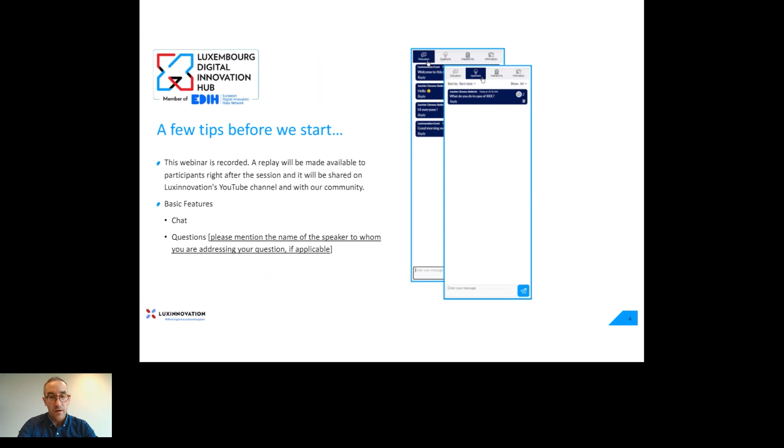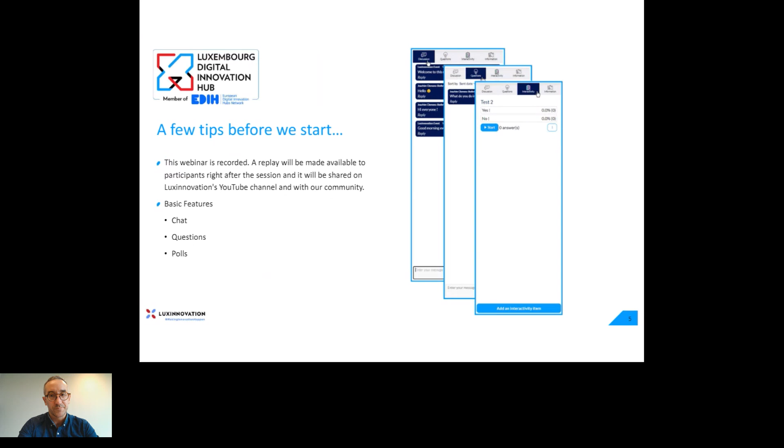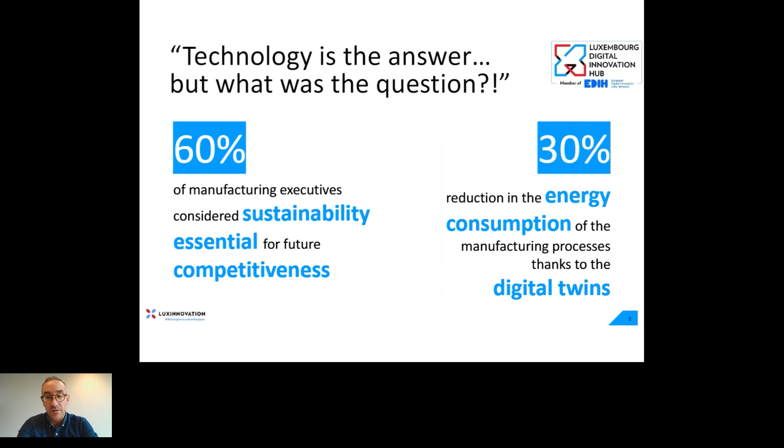So technology is the answer, but what was the question? A survey by the Manufacturing Leadership Council revealed that 60% of manufacturing executives in 2022 considered sustainability essential for future competitiveness, a significant increase from 40% in 2021. According to the same survey, manufacturers primarily focus on enhancing energy efficiency, reducing consumption, and transitioning to renewable energy sources. These initiatives are fundamentally connected to achieving net zero emission targets. This is where technology comes into play: the World Economic Forum has identified that implementing digital twins can save up to 30% of energy in the manufacturing process, as demonstrated for example by LG in one of its factories in Korea.

Without further ado, let's dive into the topic with our first speaker. Let's welcome Sébastien Thomas. Sébastien is an electromechanical engineer with a PhD in environmental sciences and management from the University of Liège, specialized in energy and environmental design for construction and renovation. As head of the energy management department at Énergie Agence, he leads a team in energy monitoring, data analysis, and efficiency improvement. Sébastien, the floor is yours.

Thank you, Nicolas, and thank you for the invitation to this seminar. I'll move to the first slide of my presentation. I'll give a few words about energy data as a sustainability lever today, starting with a short presentation of the company where I work, Énergie Agence. Maybe some of you know it well already, but just a summary: we are an engineering company dealing with services in energy and energy management.

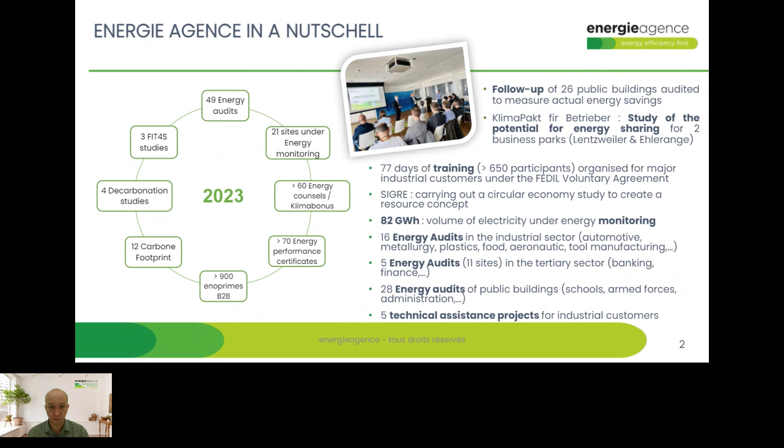Decarbonation is a hot topic today, we hear about it nearly every week in the news. There was a study in 2022 about industry and how to decarbonate. It shows there are many ways to decarbonate, but energy efficiency is quite important, with an estimated contribution of 24% to decarbonization. That's the first topic when we speak about energy data: it's energy efficiency.

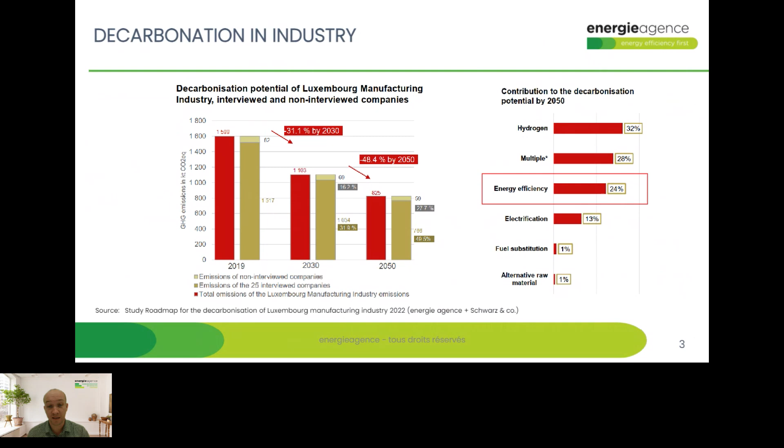I lead the department named Energy Management, but what is energy management? We have a definition: it's the process of monitoring, controlling, and optimizing energy consumption in a company or organization. It's a systematic strategy for maximizing energy efficiency and reducing energy-related expenses. It involves implementing policies, acting on equipment, and analyzing energy data.

When we speak about energy management, we have some main components. The first is data collection - we have to collect reliable real-time data to make good analysis. That's the second component. And afterward, we have to act - it's not only about analyzing data, but doing something to optimize it, and then evaluating the benefits.

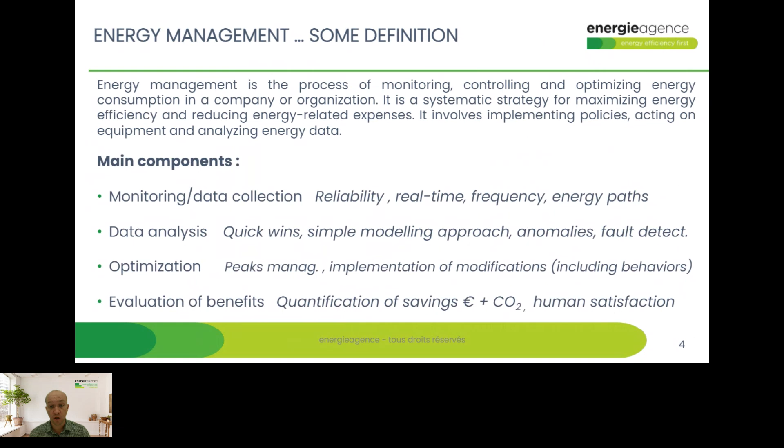Based on our experience, we have developed a methodology to show how energy management can help for decarbonation. First we assess the needs, to find the most energy-consuming parts - where is the most energy consumed? We don't measure everything, just what's important to measure. We can deploy and improve metering infrastructure. Afterward we do analysis, and what's important in data analysis is also alarm management, which is at least as important as data analysis - having alarms and reacting quickly when something isn't correct.

After data analysis, we have three levels for decarbonation. First, optimization of energy needs - to avoid peaks, to shave peaks, and to check the energy network inputs and outputs. Second, we can forecast energy consumption and generation, since many industries now have electricity production mainly with photovoltaics. And third, after analyzing data, we can propose a mix of solutions to decarbonate - not only shifting from gas to hydrogen in the future, but also dealing with storage, electricity storage, and thermal storage.

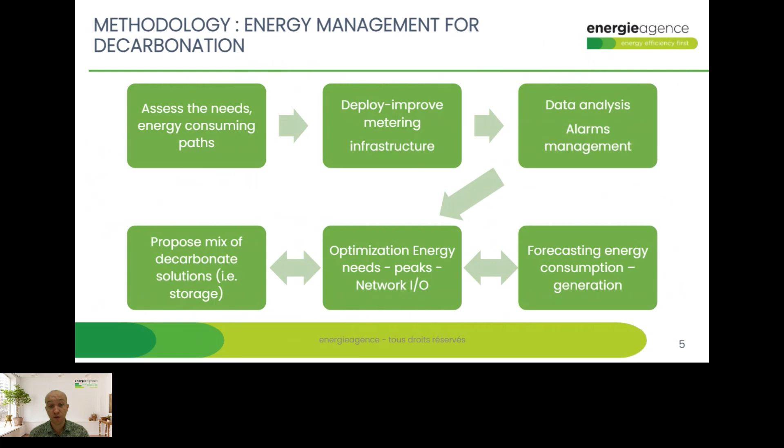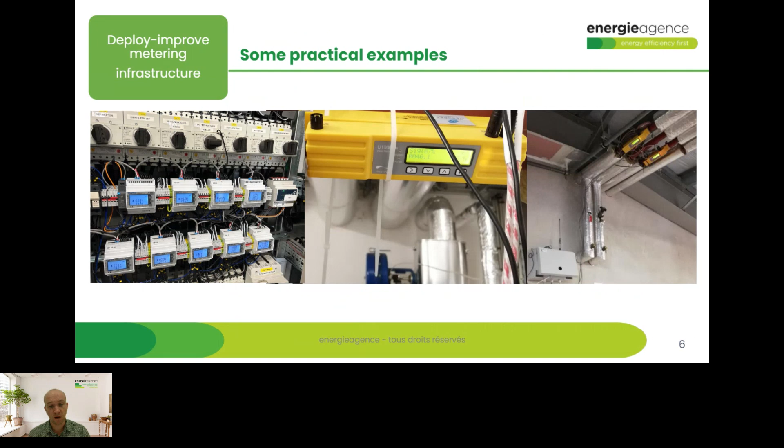That was the methodology. Now I can show a few pictures of what we practically do in the industrial sector. We deploy some measurement devices, including electrical measurement and flow meters that are non-intrusive, because we don't want to cut pipes, hot water, or steam pipes to measure.

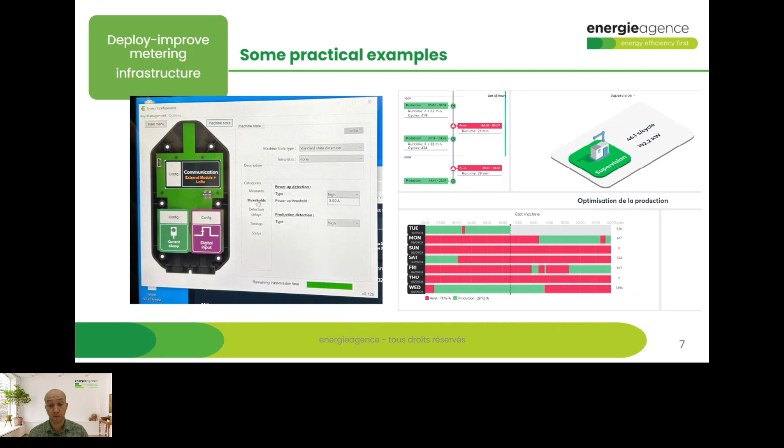We have another picture showing a way to measure, and I will come back to that, for your most energy intensive machines, to measure the cycle, to know when we have consumption, when the machine is on, standby, off, and so on. We can deploy this kind of measurement and grab data about that.

We can also improve existing infrastructure. When you have counters, we should not install more and more counters, we can connect to existing ones. Here are some examples about smart counters, gas counters, and the electricity measurement you have in your facility.

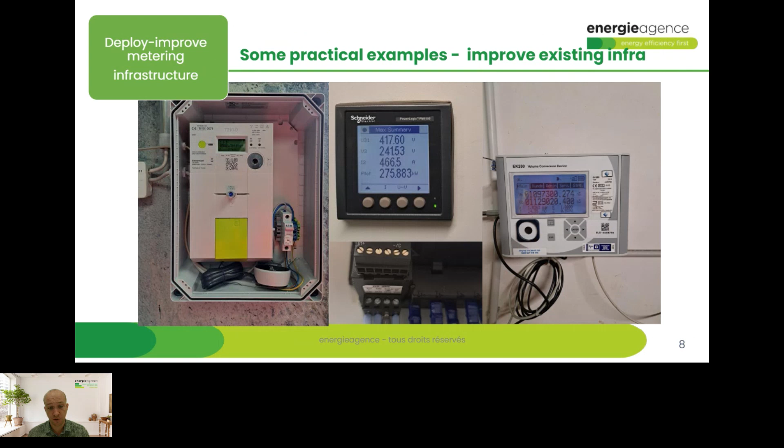Not going into details of the infrastructure, but measuring infrastructure for energy is quite complex and not easy to implement. So I will give some points of attention not to forget when deploying an energy metering infrastructure. First, we speak about energy, but energy data alone is not sufficient. We need other data - if you want to improve your process, you also need production data and so on.

The interoperability of systems is very important, to avoid installing counter after counter, and to have existing infrastructure that can communicate with other infrastructure. What's also important from our side is not only measuring electricity, because that's easy, but coping with different kinds of measurement, to be sure what the energy vectors are and how we use them. So steam can be interesting, compressed air, water, and so on.

Another point of attention, which is a common belief in the industry - at some point, a data analysis tool is different from a supervision tool. When you have a supervision tool, you generally have no real capabilities of analysis. So it's not the same thing. We must pay attention to that.

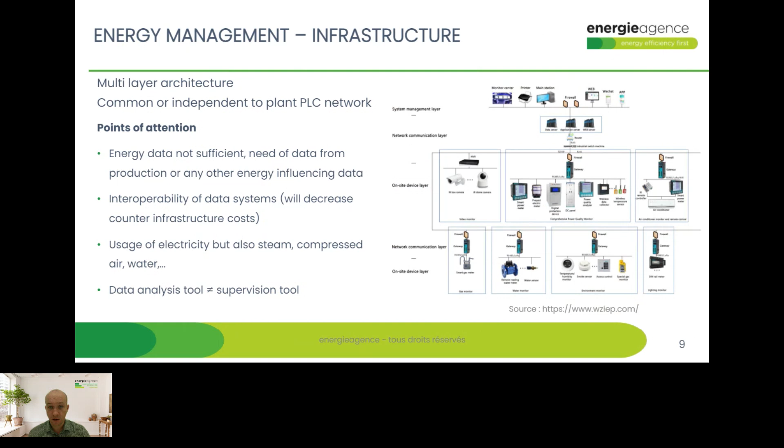It's an example. We also have other examples of dashboarding, which is important to see in real time what you are consuming, what your energy use is in your company or manufacturing plant. It's something that seems to be important.

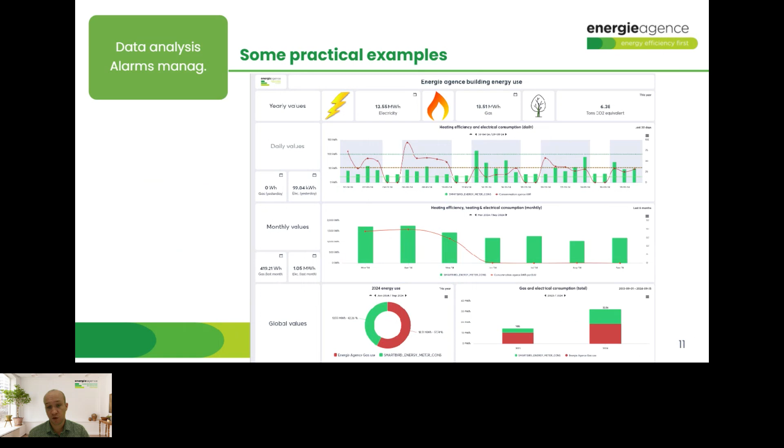We also have some graphical tools. I won't go too much into details, but we have practical graphical tools to show and find out where the energy efficiency opportunities are, where the energy reduction potential is, in fact. So these are the tools we use for analyzing.

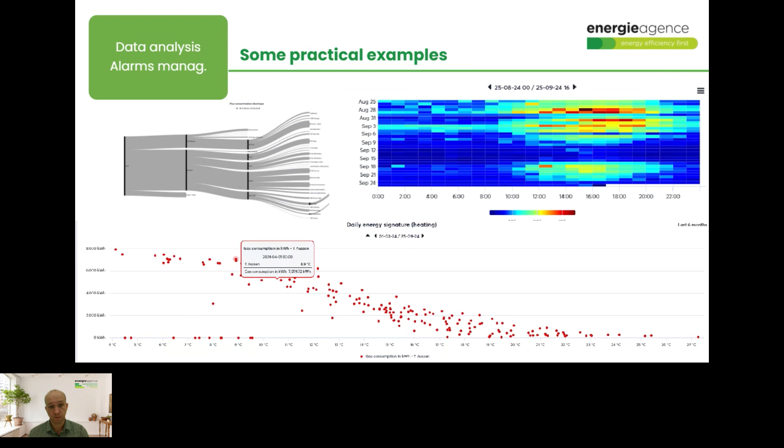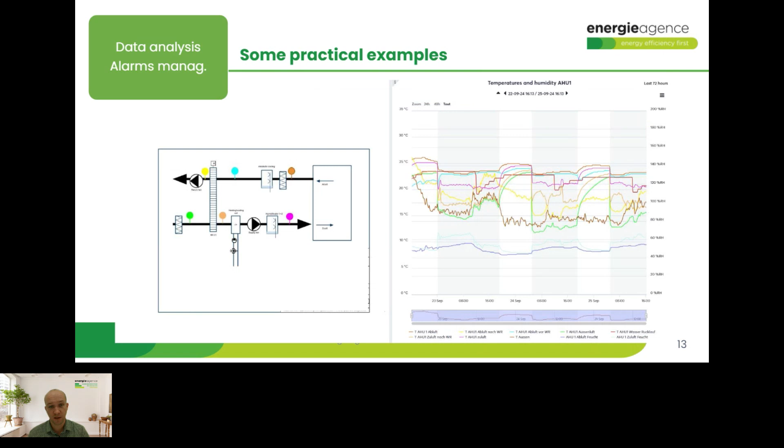Here's another example for ventilation. As I said, it's not only about measuring energy, it's also measuring temperature and so on, to be sure we have the most energy efficient equipment. And now I come to the conclusion about energy management and the importance of measuring energy.

We have seen energy efficiency is key for decarbonization, and to achieve energy efficiency we must first collect data and do analysis. We sometimes summarize energy management as only artificial intelligence, only sensors, only data, only web applications, but in fact there are many disciplines involved, so it's important to cope with all these disciplines when speaking about energy management.

Our experience covers around 25 sites that are completely monitored. Every time we find quick wins, and large quick wins, because generally people don't know exactly what their energy use is. So operation schedules and pump operation are things that are easy to change and can lead to large energy savings.

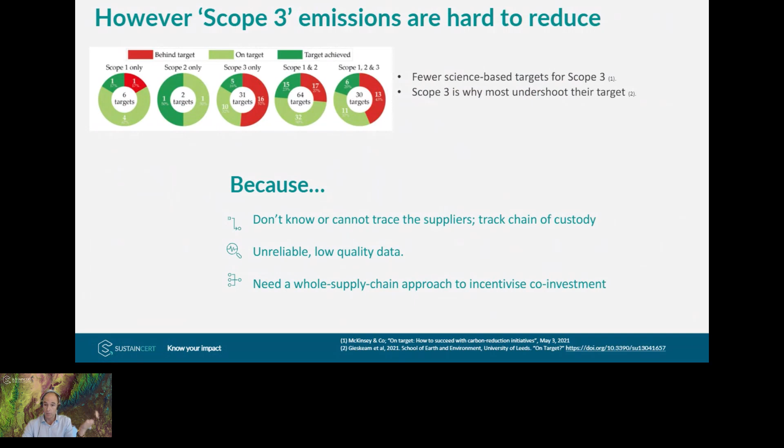So really the challenge is, how do you take data from an intervention in a mid-product manufacturer, an intervention to reduce emissions, and apply it to others downstream so that they can claim those reduced emissions? It's not always so simple, because supply chains are dynamic. You don't know year to year exactly who you're going to be sourcing from.

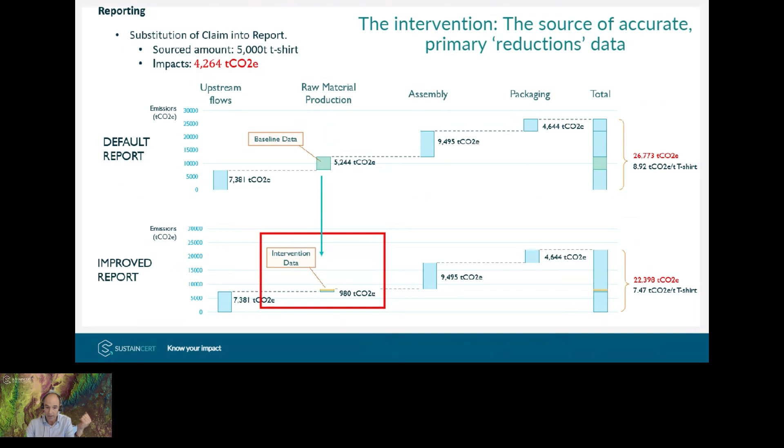The Vivid platform manages this from A to Z. What do we mean by an intervention? On the top you have business as usual, with this baseline data for this particular process. Once you've implemented a reductions project, you reduce your emissions, as you can see in that red box, and those reductions carry out right down the whole supply chain. But it's taking that data and applying it to the others that's key.

As we can see here, we have an energy efficiency reduction project happening. Actually this is a real project that happened, replacing coal-fired boilers with biomass ones in a facility, and there was ultimately a reduction of 14.8% of the final footprint.

How do we manage the application of this data, the attribution of these reductions to all of those downstream, right down to the consumers, so that they too can claim this type of reduction data?

The key to this is being able to take that reduction data we've just seen and unitize it into what we've called impact units, so that once those reductions have been modeled by the Vivid platform, right across all of the impact layers, the supply chain tiers, if you like, of the whole value chain, those impacts will be available for any firm downstream who've ultimately sourced from that facility that made the reductions.

The reductions are unitized in impact units, tons of CO2 reduced, basically real primary data about the emissions that took place upstream, but to what extent they form part of your footprint downstream. And of course, as you go downstream you're going to be adding emissions from your particular part of the value chain, but there will always be that slice of your emissions that is now lower because of that reduction that happened upstream.

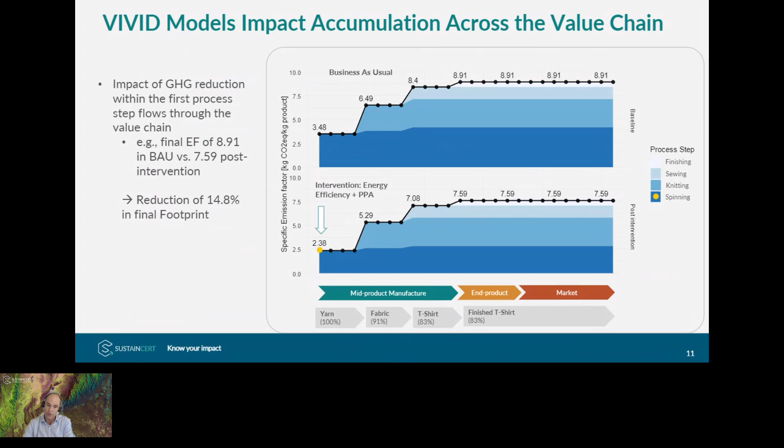So this is a bit of what Sebastian said as well - this is about the reduction of your overall footprint and making sure that you're credibly claiming and integrating into your own footprint, or your own greenhouse gas inventory, that slice that has been reduced thanks to that project in the facility.

So the impact units that unitize these reductions look a bit like this, and give you all the information about where that facility was, how much was actually impacted, the amount of materials that came out of that facility thanks to that reduction, and the year of that intervention, so that it can be claimed into the year of your greenhouse gas inventory report.

Here's a little example from the agricultural domain for soybeans, but this could equally be for high-tech materials in the apparel industry or whatever. It gives you all the information you need to be able to track the amount of impacted goods, the amount of reductions that happened, and also the tracking of ownership of these particular claims.

What's really important here, and what this system does, is making sure there is no double counting of reductions, so that everything that was impacted by that facility, and only that amount, can be claimed at a lower emissions factor. We really track this for credibility of claiming, so there are guardrails to make sure that what you claim is really what was impacted by that intervention.

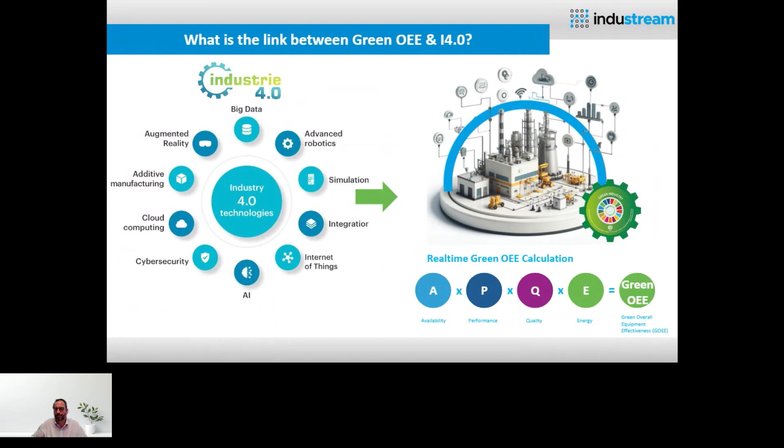So I will now show you a few examples, starting from big use cases, but going down to smaller, easier use cases that can be reachable for small and medium industries.

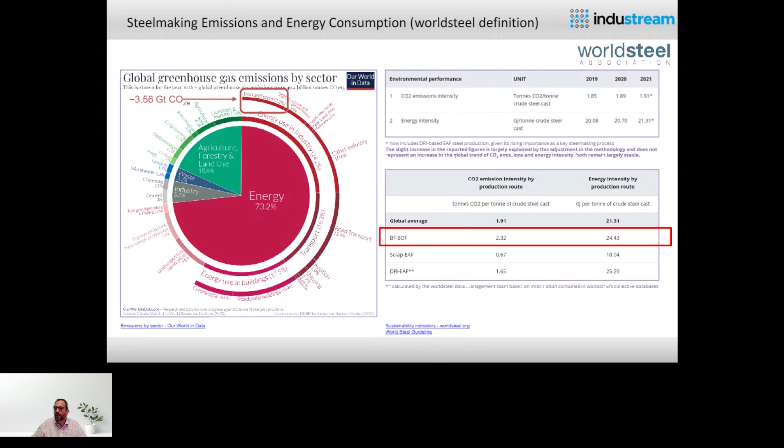Starting with emissions, if we look at the industrial sectors - and this is well-known from studies available online, which is why I'll speak about this sector - iron and steel production is the main contributor to gas emissions, representing more than 7% of total emissions. In particular, the conventional blast furnace and BOF route is the one generating the most emissions. That's why I started with this type of industry as the first use case.

In my previous experience working at Paul Wurth, I was leading the digitalization team as well as the process optimization team, and we helped iron and steel producers optimize their blast furnace production.

This is a quite old process. In the last 100 years, the specific energy consumption per ton of produced hot metal has already been divided by 3. That means we're of course not able anymore to reach 30% improvements using digital solutions, but nevertheless it's possible to reduce by 2-3% just by using digital solutions to optimize the process and reduce the energy consumption, which in the blast furnace mainly comes from the carbon charged material and injected material.

So the customer had the following problem: a lot of emissions, pressure from governments to reduce these emissions, and also taxations related to them. But not only that - it's quite a complex process to maintain, and also to ensure that all operational shifts operate in the same efficient manner.

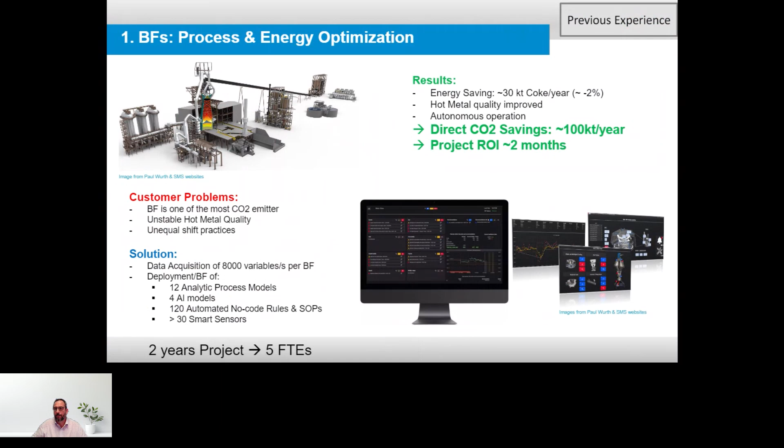Moving to smaller use cases, again in the steel industry - this is an example from a German steel maker where the problem was surface scratches on the produced billets, due to a problem coming from the equipment itself. The guiding rolls, due to harsh conditions and difficulty of maintenance, were from time to time stopping, blocking, and generating defects by scratching the products going through.

The idea was to implement a quick solution to first monitor the situation, to learn where the problems were coming from or what the root cause was, in order to predict in advance the failure of the guiding rolls and trigger maintenance activities to avoid the blockage and the defects.

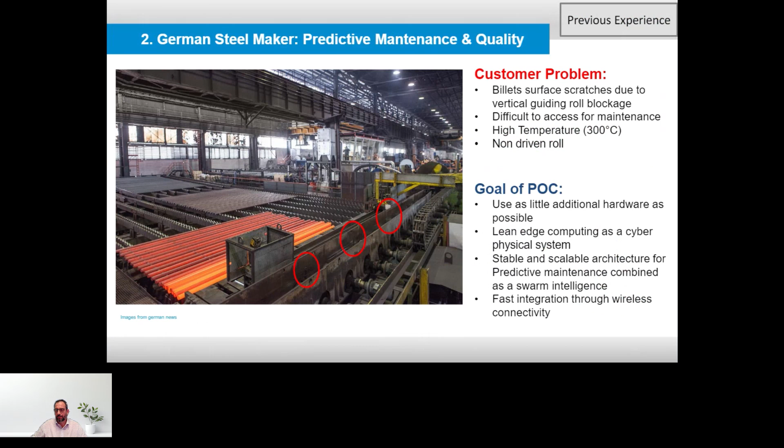So for that, we have implemented a quick solution using smart sensors, or conventional high temperature optical sensors that are looking directly on a painted mark on the free rolls, acquiring this high-speed data through an edge device, streaming it live to the cloud in order to start building monitoring solutions, then learning the patterns and creating anomaly detections when the mechanical problem starts to occur, in order to organize the maintenance in time.

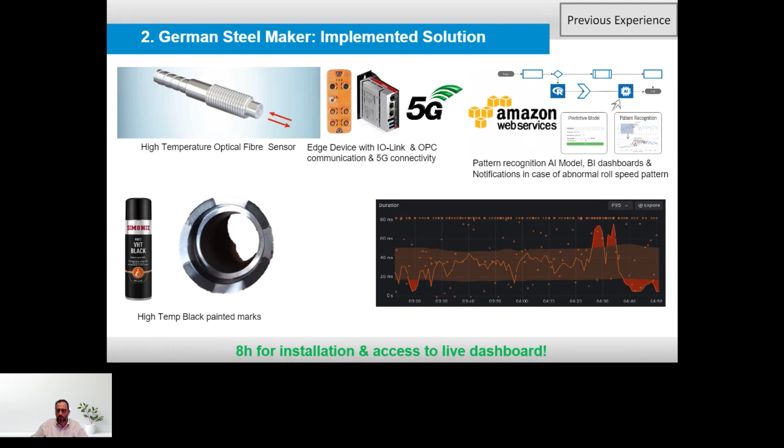Especially in these harsh conditions, this is always a problem. By doing this, we've deployed a solution that avoids this type of problem, with 8 hours for the installation and already access to the first monitoring dashboards. A few weeks later, we deployed models predicting the failures and warning the maintenance team directly in order to make their maintenance activities.

The good thing is the customer was so happy that he saw the possibility to use the same approach and extend the project to other use cases. So on another machine, monitoring the failure of the shaft of the coiler, just by detecting using high-speed signals with the same technology of acquiring and streaming the data, measuring the torsion of the mechanical shaft. Again, very quick deployment and very quick solution to solve this specific problem.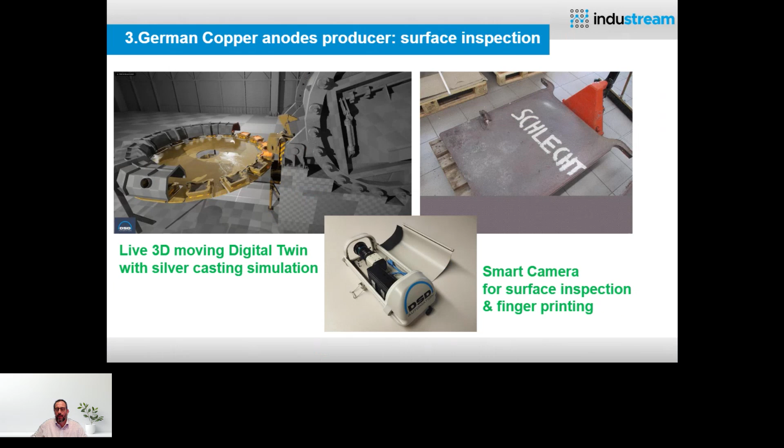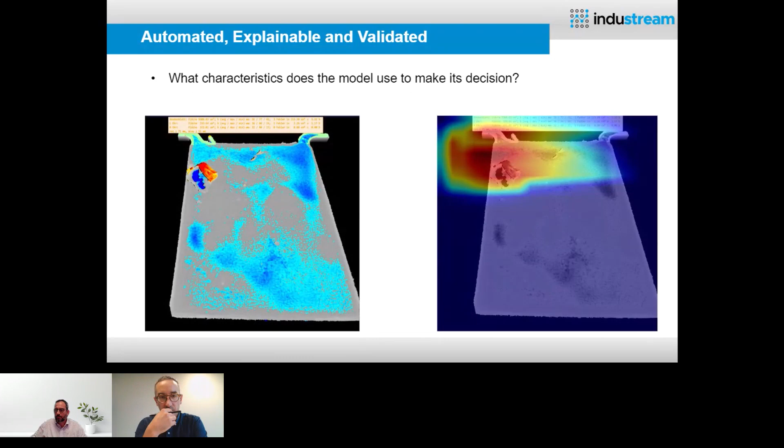But for that, we had to put in place an identification system. So once you detect, by using machine learning and deep learning approaches, the anomalies, you of course inform the operators that there is a problem, and you use machine learning again to automatically, like fingerprinting, define an absolute ID of this plate, and then you can start looking for correlations between the defects and the process conditions.

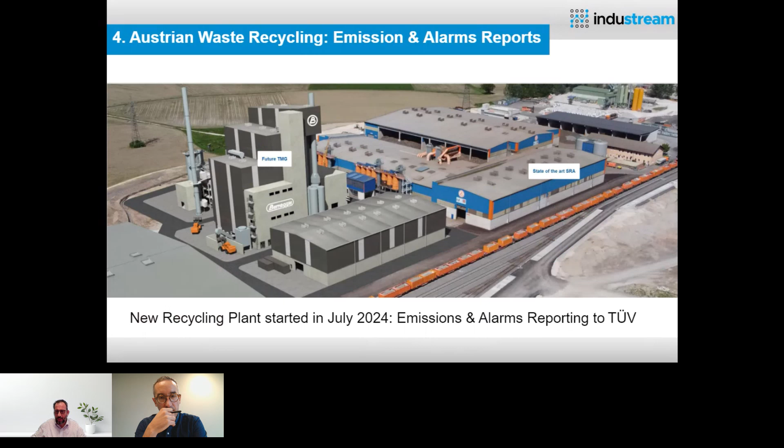Another, even easier use case was for a recycling plant where the customer had to produce reports and KPIs for the local authorities in order to keep the exploitation permit valid. So we've been acquiring production data, generating KPIs and dashboards for this customer, available automatically and sent to the authorities.

What can IoT sensors bring in these use cases? First of all, they bring speed by avoiding the conventional cabling, wiring, and modification of the automation system, enabling direct acquisition and quick visualization of the problem, then quick delivery of a counteraction.

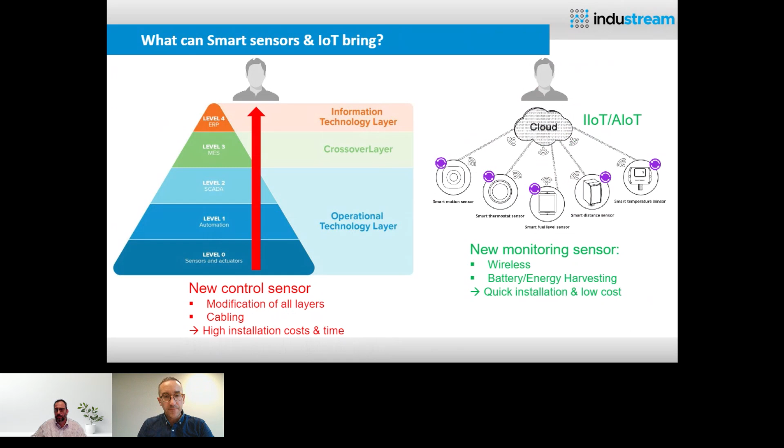So for that, we developed our InduStream platform that covers this step-by-step approach where we can adapt the content in a no-code manner for different use cases. It's quite unique in that it can combine, as shown in one use case, the possibility to acquire time series data and combine it with video data.

It was designed, especially using open source solutions, to be affordable for small use cases and for SMEs. So you see some examples of this no-code design, and this is quite complementary to talk number 2, which was already given on no-code platforms.

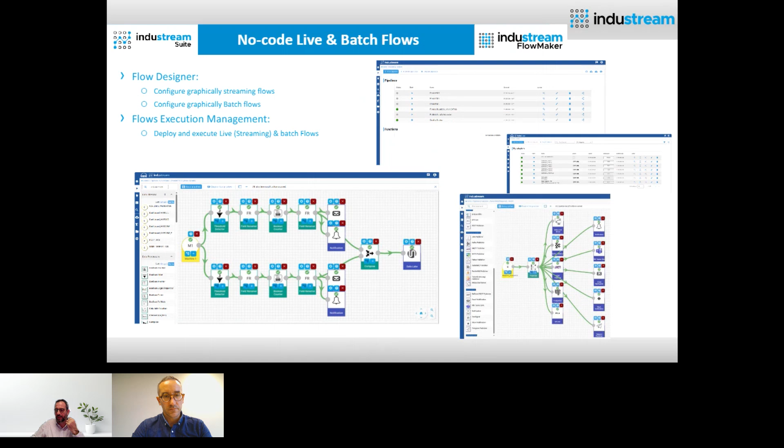But here we focus on the OT side, close to the machine, in real time, with high frequencies, with the possibility to support real-time decisions of the operators and even close the loop with the automation system. In this platform, you can capture the knowledge of the operator and enrich it with AI by importing ONNX models or by directly importing Python code generated by the data scientist.

The solution is scalable - you can deploy it locally on edge devices, in the cloud, or on-premise at the customer. We don't only provide software; we also embed this platform into different kinds of devices, including smart cameras.

You can then, as already shown in the first presentation, enrich, in addition to all the available information from the automation system, by adding monitoring sensors to enrich the level of information, whether it be vibration analysis and so on.

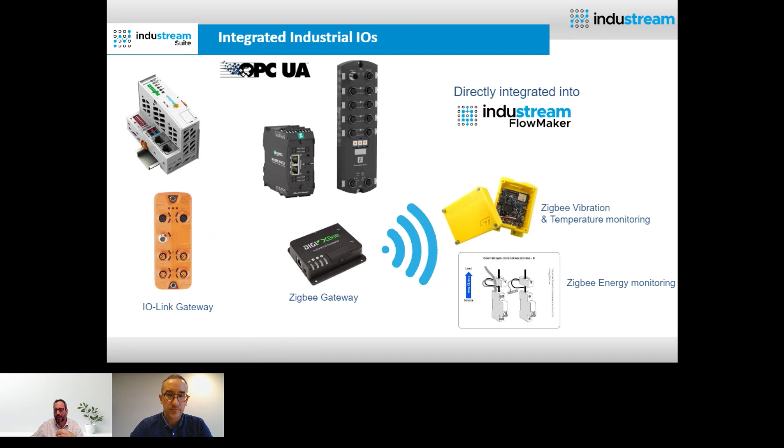But there is also, as we are talking about monitoring, cheap solutions to do this. As a key takeaway, I would like to say that this type of approach allows SMEs to unleash the data potential. Usually there is a lot of data available, maybe not in all SMEs, but this data is not really used. A recommendation is to start small, but really with the potential to upscale, and as I've shown on the use case, to have the possibility to quickly deploy to other use cases.

So the no-code approach has the same benefits as, I would say, on the IT side. It's bringing speed into the deployment of the use cases.

So, but at least on the operational side, AI is bringing something, but not only AI. I would say you should really use and capture and trust the knowledge and expertise that you have in-house, and make it available for everybody through this kind of platform. It brings transparency and helps as well to identify the bottlenecks and to have better decisions on the future investment that, of course, will be necessary to reach further levels of decarbonization.

I would say, as usual, the process remains key. Having an optimized process will help, of course, as well to reduce the energy consumptions and the CO2 emissions. And the easiest way to achieve this, or to reduce the carbon emissions, is to avoid the defects, because that's really consuming a lot of energy if you have to rework the produced goods.